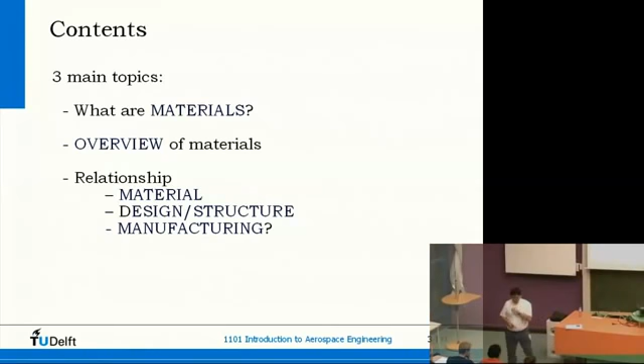First we will briefly discuss what materials are. Can we bring forward some kind of definition for it? What kind of materials are interesting, and then in particular for aerospace engineering? And then I also will tell a few things about different aspects of materials, like the properties and how to design with it and how to manufacture with it.

And then you will see there is a close relationship between these topics. Okay. First question: what is a material? Could you describe a material? Could you give some features of a material?

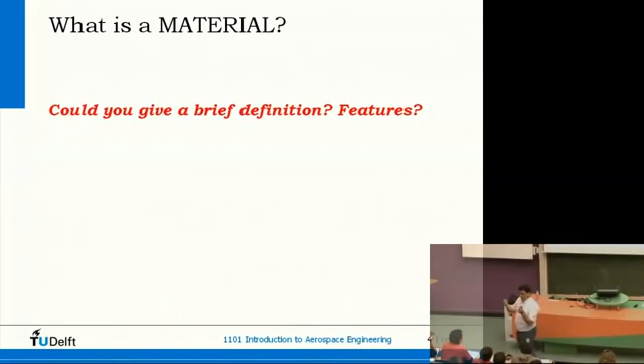Basically, some specific density, strength, which can best do the job. Material has strength, density, and so on. Yeah, density, weight, has some properties indeed. Composition of elements, yeah.

Actually, to give a very crisp and clear definition, that's rather difficult. Also if you look into textbooks and dictionaries, it is rather complicated to find a very nice, neat definition. If we talk about materials, we often have to do with substances, with matter.

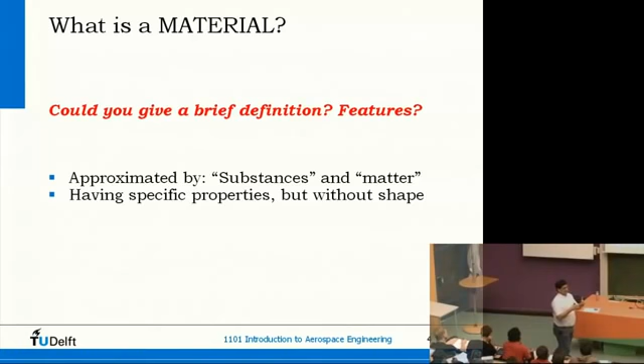All the properties which I've heard already, strength and stiffness and composition, those are related to that material, and it is not related to any geometry. That's the difference, for instance, with a structure and a material. A material has substance, has properties, and a structure has substance, has properties, but these properties are also related to its dimensions.

We can talk, for instance, about the strength of a material. We can also talk about the strength of a structure. If we talk about the strength of a material, we can zoom in as far as we can, and still that material has the same property. For a structure, the strength is also related to its size, to its dimensions. Small structure has small strength, large structure, large strength.

I'm sorry, I don't want to interrupt, but wouldn't the fact that it is a material and that it exists mean that it would have a shape by definition? That since it is a material, it has to have a shape, because without having a shape, can it be a material? But over here it says it's without shape, so it doesn't exist.

Of course matter always has at least some dimensions, but the idea is that if you talk about density of a material, let's take density: however I make the size smaller and smaller, the density does not change. The density remains the same, even if I have a very micro small portion of a material, it still has the same density. If I have to calculate the weight of a structure...

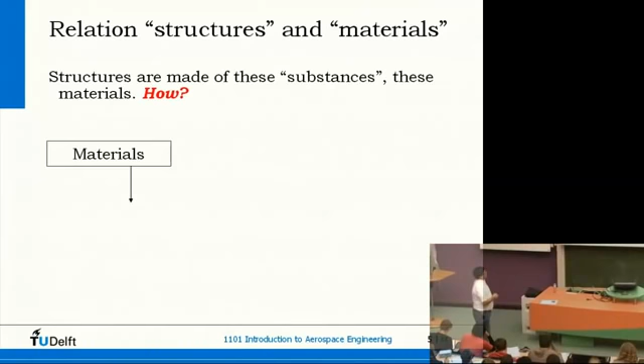And these materials can be big blocks, small pellets, powder, pellets, blocks, whatever. These materials are transformed into so-called semi-finished parts, and semi-finished parts — think about, for instance, sheets, profiles, fibers, and so on.

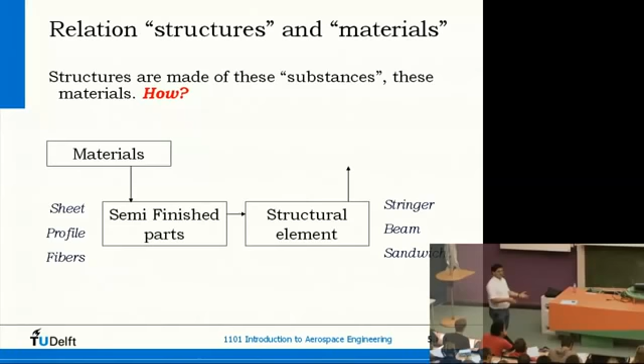From these semi-finished parts, we are going to create components, structural elements. And the structural elements can be a stringer, a beam, a sandwich — I showed some of them last time. And as soon as we assemble those, we obtain our structure. So yes, there is indeed a strong correlation between these two, but more or less via this route.

Okay, let's zoom in a little bit on materials. If we look at materials, there are a number of main groups, to say so. First of all, we do have the metal alloys. Not all metal alloys are significant for aerospace, as you will see later on, but this is a very big group. It contains steel, zinc, lead, aluminum, magnesium, all kinds of metal alloys.

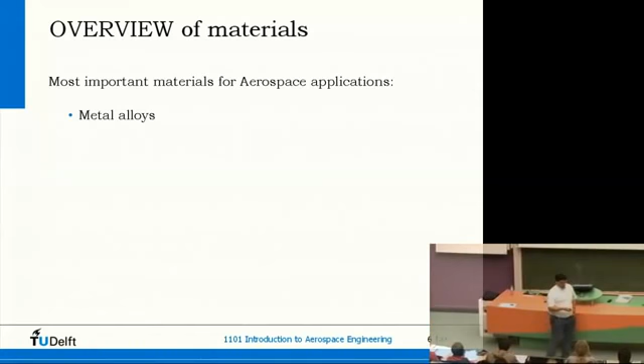The other one, which is often used in aerospace, are so-called composites. A composite means composed of, you could say. It's composed of multiple materials, and I will tell later on how it is done. Fibers and resin, sometimes even metals are included, so then you have a hybrid material.

Some things are made out of duraluminum. What is that again? Duraluminum is some kind of aluminum alloy. If you look at aluminum, you have plenty of different alloys. Every alloy has its specific features, its specific characteristics. So things are not pure aluminum. Pure aluminum is only used sometimes as a very tiny surface layer because it is very corrosion resistant. But the structure itself, the load-bearing structure, is always an alloy.

And duralumin is one of them, but that's an old name. Nowadays we have much better alloys, I think.

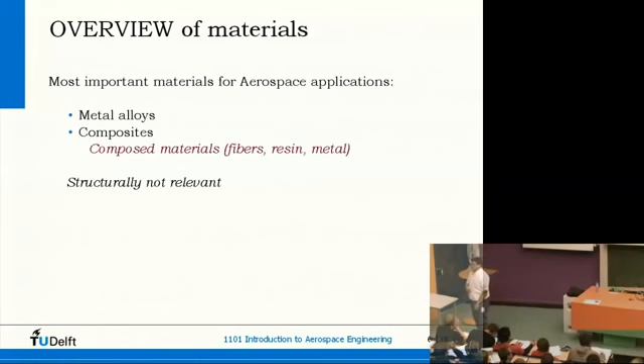Okay, other main groups are, for instance, the polymers and the ceramics. Both are, at least for aerospace, not really structurally relevant. If you look at polymers, you have to think about plastics. Plastics are very nice materials for households, for gardens, for whatever, but you don't use them in highly loaded structures. Then the strength and the stiffness of these materials is way too low.

Ceramics, on the other hand, has another problem. As you can see, it is way too brittle. It is very notch sensitive, and it breaks very easily if you have a load which is not properly applied to a structural part.

I think I don't have any pictures of it, but remember one of the shuttles was damaged by a piece of foam which hit the leading edge of the space shuttle, and later upon re-entry, you saw that the whole shuttle disintegrated because the heat could come into the structure and so on.

That leading edge was made of carbon-carbon, a special kind of ceramics. It's very strong, very heat resistant, but it is also brittle. So if you have an impact in a very specific way, at a very specific place, it could crack, it could damage, it could puncture a hole in it. And that happened in that case. The leading edge was not designed for those kinds of impacts. They were not anticipating it; only very small impacts could be sustained by that leading edge. But there you see, for instance, how a brittle material can be very nasty if it is not used in the proper way.

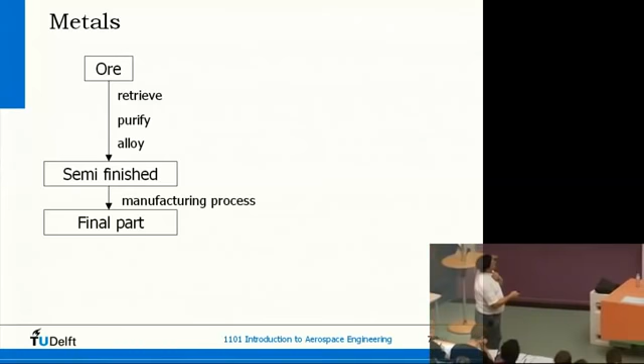These two terms, purification and alloying: purification means that you try to remove all the materials you don't need. So if you have, for instance, iron ore, which usually comes in pellets, small bits of rock where the iron is inside, you try to remove all the non-usable materials. So extract the iron from it, and all the phosphor and sulfur which comes with it, in many cases, should be removed. That's purification.

On the other hand, we would like to add a few things, in many cases, to get the right properties. There could be some chromium, or some molybdenum, or some carbon, or whatever type of alloying elements we would like to need—we put it in. So if we have a molten material, first of all we try to get out all the unwanted stuff, and then put in the stuff we want. That's the difference between purification and alloying.

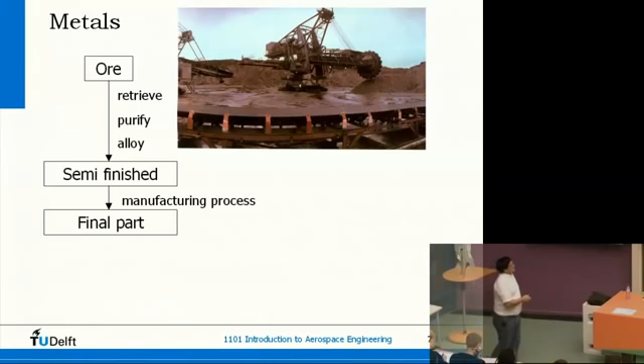After that, we do have a semi-finished material, and in many cases it is first cast into very large blocks. Maybe I have to trim a little bit of light.

Come on. This is the typical sequence for iron ore.

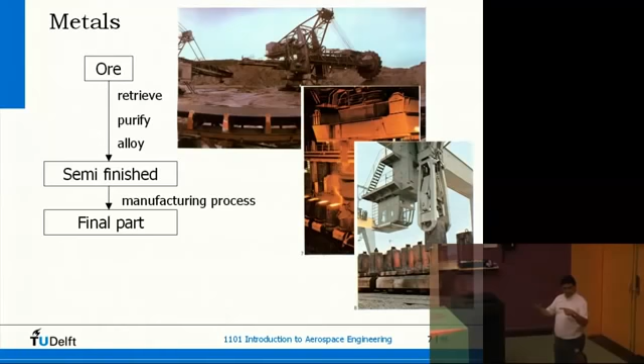Here you see very large blocks, about 2 meters tall and 1 by 1 square. So these represent more or less about 40 tons each. And you can still see that they are glowing from the heat. They are coming from the casting mill, cast into these shapes, put on lorries, and later go to the mill to be rolled out into thick plates or sheets.

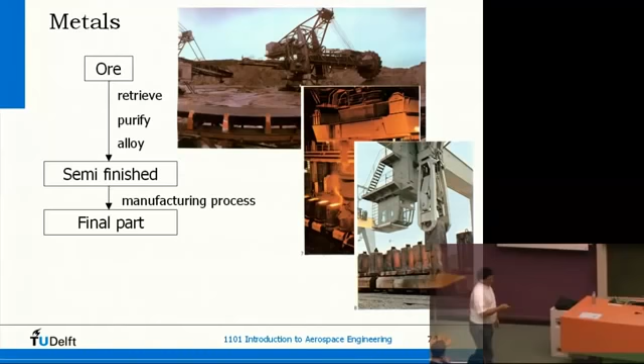And then we have so-called semi-finished parts. Other options are also extrusions, profiles, and so on. From here we go to the final part. So when we have a sheet, we can press form a part from it, and then we have our component which can later be assembled into a structure. Okay, this is typical for iron.

Question: what are the names of these processes used for aluminum and for iron? Iron is the blast furnace, yes. I can't remember the proper name for aluminum, but it's electrolysis, yes. So indeed, blast furnace and electrolysis.

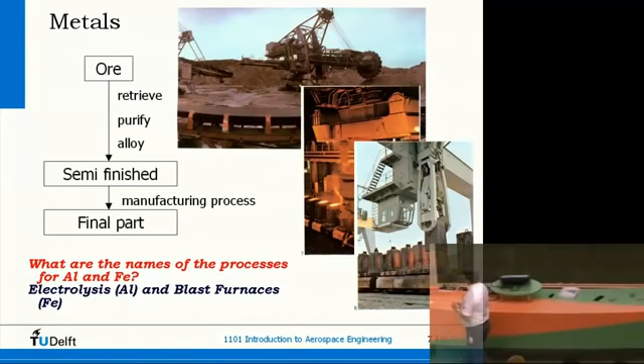This is, by the way, a very energy-consuming process. In Holland, for instance in Borssele, we have a nuclear power plant, and that was built there because next to it, in the harbor of Flushing, there was a very big aluminum plant, and a lot of that energy went into that plant. That's why it's also very important to recycle aluminum, because then you can get new aluminum at much lower energy levels.

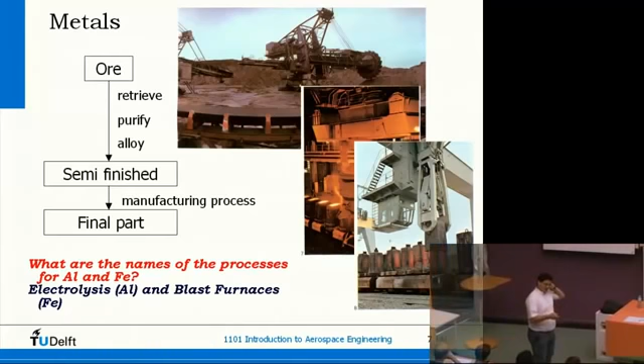Metals have a number of typical properties. First of all, most metals are isotropic. What's isotropic? Anyone know?

Actually, isotropic means that the material properties are independent of the direction. So if I take a piece of material and determine the strength in this direction, it's identical to this direction or that direction. Same with the stiffness. Of course, the material is also homogeneous, so the density is the same everywhere. That means isotropic. Properties are independent from the direction which I take in the material.

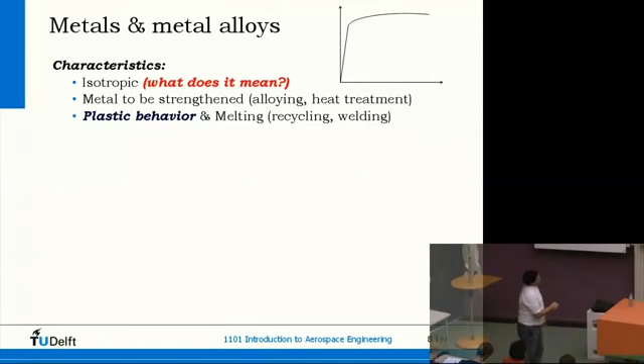Okay, most materials are indeed isotropic. The strength we obtain usually by alloying and heat treatments, putting in materials and doing some heat treatments, that will be told later. Most metals also show plastic behavior, and plastic behavior has a very beneficial advantage because we can shape a product from a flat sheet.

Metals can also be melted, can be made fluid. This also has an impact on, for instance, recycling, welding, casting - good processability and often low cost. Not all metals are cheap, but a lot of them are cheap.

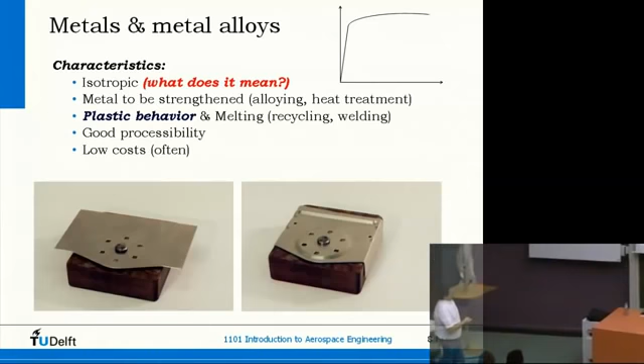Next slide, you see some properties of metals. Just to show you, first of all, the density has to be related to the weight. Then the Young's modulus - you already had some information about these properties, or not? Some yes, some no. Well, it has to do with the angle of this one.

The steeper the curve, the more resistant the material to deformation, and the higher the Young's modulus - the stiffer the material. Stiffness means resistance to deformation, and the stiffer a material, the larger the force I need to give it some deformation. That's represented with this number. So steel has a high stiffness when you compare it to aluminum, and titanium, for instance, has some intermediate value.

Yield strength is this point, the transition from elastic into plastic. During operation, I always have to stay below that. When I would like to manufacture by plastic deformation, as in the previous slide, I have to go beyond that point. Failure strength is the maximum strength, and the maximum strain is the maximum deformation I can take, if I plot this as a stress-strain curve.

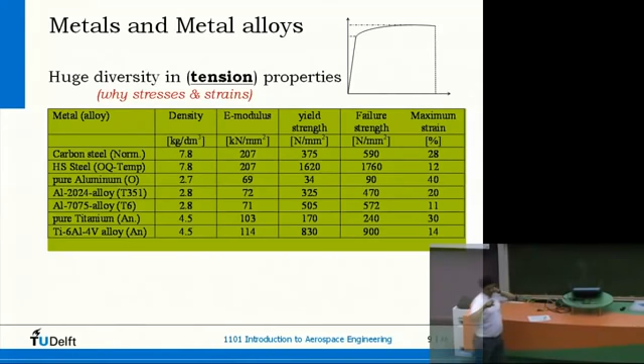Realize this is also only for tension. If you go to bending or to compression, you can have different ratios, different formulas for the stress and the density. But for this simple application, pure tension - and I challenge you to look for it at home - you can have stress divided by density.

If you do that, you find these numbers, and that's what we call specific values. What's very striking here is that most of these specific stiffnesses are more or less identical. If I go back, here you see large differences, but this large value is also divided by a large density, so this ends up almost around 25. More interesting, of course, are these strength values, yield strength and failure strength.

Now what you see is high strength steel is still maybe the highest, but not by that huge difference as on the previous slide. Titanium here is also coming very close, and also this aluminum is coming very close.

So now if I have to design a structure, I will not only look at these specific properties, but also look, for instance, at thicknesses. If I need a specific force and this ends up with a thickness of 0.3 millimeter, that's very thin, so it will be very vulnerable by handling or by impact. Aluminum probably will be about 1 millimeter if you compare it. Titanium maybe 0.6, 0.7 - much more rigid, much more sturdy to impact and these kind of things.

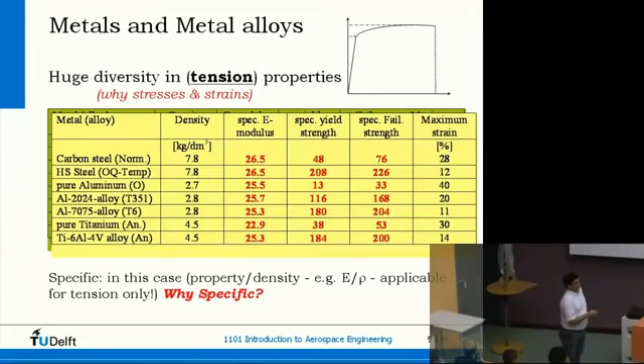Next group is polymers. As I said before, polymers are not very interesting from a structural point of view, and still I would like to have a quick look at them, because polymers are one of the major ingredients in composites. Some specific properties of polymers are also influencing my composites.

Two main groups, thermoplastics and thermoset polymers. Thermoset polymers are made by reaction. You have two components, you bring them together, they react, make a molecular network, and that whole process is irreversible. You cannot turn it around. So once you have cured your polymer, the shape cannot be changed anymore.

That's different with a thermoplastic. A thermoplastic is made of large molecules with some weak bonds between the molecules, some kind of spaghetti. At room temperature, it's rigid. You can use it, but heat up the temperature, and the bonds between this spaghetti disappear. It becomes more fluid, so you can reshape it, and you can redo that frequently.

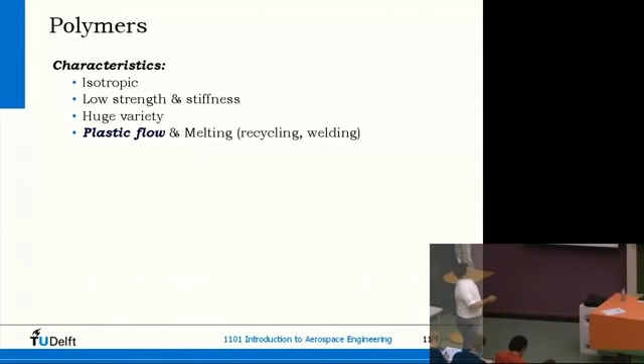All these plastic coffee cups we have, but also plastic chairs and furniture for the garden, are all made by injection molding, this process. Tooling is usually very large, but since you have huge quantities, it's not really a problem. Good processability, and in many cases, cheap. Very cheap materials.

If you have thermoplastic materials, you bring two together and you have a local heat source like a laser. You can locally melt them, push them together, force them together, and you get a weld.

It has not really become fluid, not very water-like material in between. It is some paste material, whereas in metals, you really make it fluid, you really make it liquid. But indeed, it is some kind of welding, local heat source and pushing together, and you have a weld.

Okay, polymers, composites. Composites are made of polymers and fibers. Many different types of fibers are available: glass fibers, aramid fibers, carbon fibers, dyneema fibers, and so on, and so on. Boron.

Short, long, and continuous. We mean with short only a few millimeters, and with long a few centimeters, and with continuous, well, at least a meter or longer. Most of the high structural parts, the high performance parts, are made by continuous fibers, because those can be oriented in a certain direction, the other ones cannot.

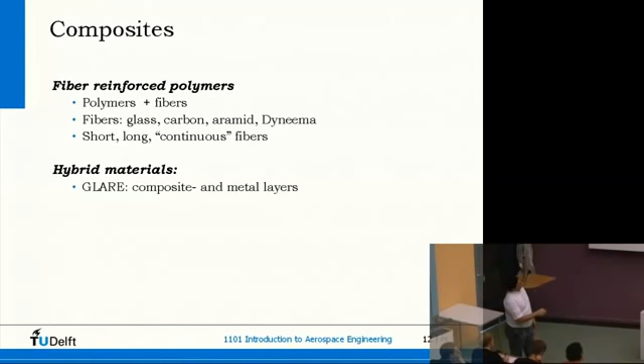In many cases, in components with short and also with long fibers, the fibers are more or less oriented at random. The direction is not controlled. That's possible with the continuous fibers, not with the short and long ones. Hybrid materials, that's actually polymers, fibers, and metal layers. That's sometimes called a composite, sometimes called a hybrid material.

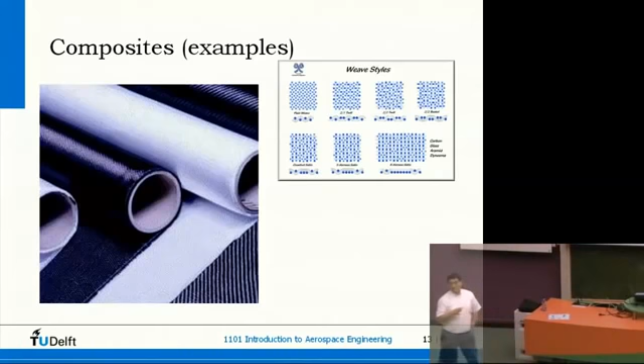In many cases, yellow is, for most reasons, if there's no resin to it, aramid; white, glass; black, carbon. So you can recognize most fibers. It's not always true, but as a rule of thumb, you could say so.

If you look at composites, I would like to explain a little bit the principles of composites. Realize the fibers are the materials in there which are strong, which are stiff.

And for the strength and the stiffness of a component, these materials are sufficient. But as we have a rope, we can pull onto a rope, but we cannot compress a rope. As soon as you have a fiber, you can tension it, but not compress it, because then it buckles in all directions.

That's where the resin comes in. The resin is there for supporting, making it able that you also can have compression forces on composites, and of course also to protect the fibers, so that no moisture or whatever can degrade my fiber. But the strength and the stiffness is provided by the fibers.

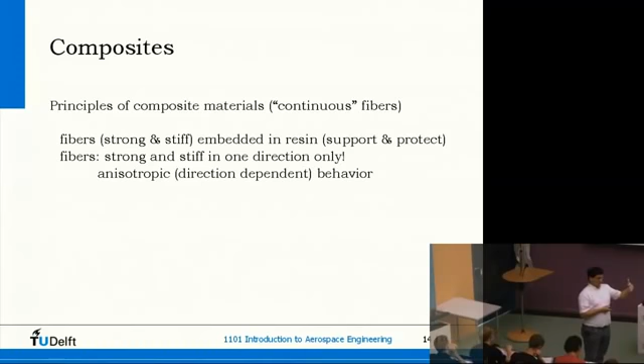Fibers are strong and stiff in one direction only. If you have here, these resemble the fibers. This thin layer of fiber composite has strength in this direction only. In the other direction, the strength is related to the polymer, and that strength is rather low and can be more or less neglected. If I also would like to have strength in this direction, I have to build up a so-called laminate and put layers in different directions.

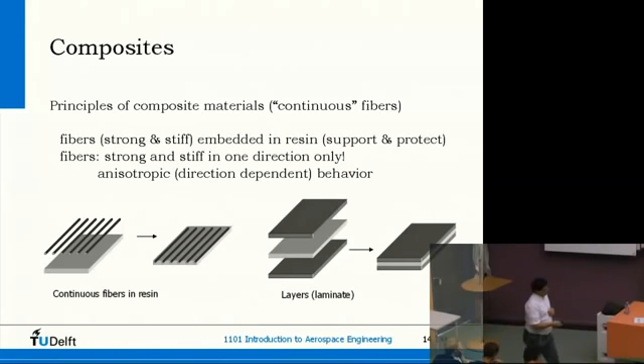Some features of composites: highly anisotropic. That means the properties do depend on the direction I will look for.

It has also a benefit. If I have a strip like this, and the main load is in this direction, the length direction, I can put most of my fibers there, in that direction. Very little amount of fibers in that direction for coherence, but most of my fibers can be in that direction. Then I use my material very highly efficiently.

This is a metal one. It is as strong in this direction as in that direction. In that direction, I don't use that strength, so it's over-designed more or less. That's why composites can sometimes be very lightweight.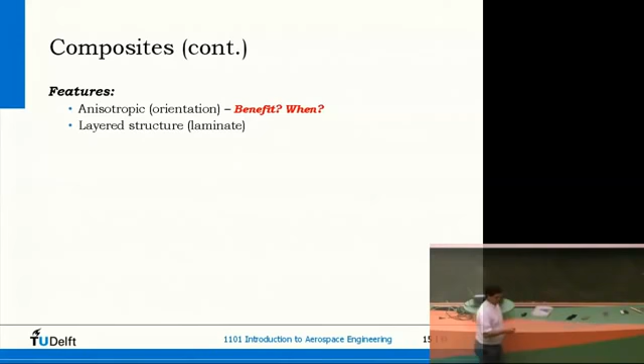It's a layered structure, high strength stiffness, low density, no plasticity. Processability is also rather good, and you can make nice parts of it.

Sometimes made in laminates. It's too fast. Yep.

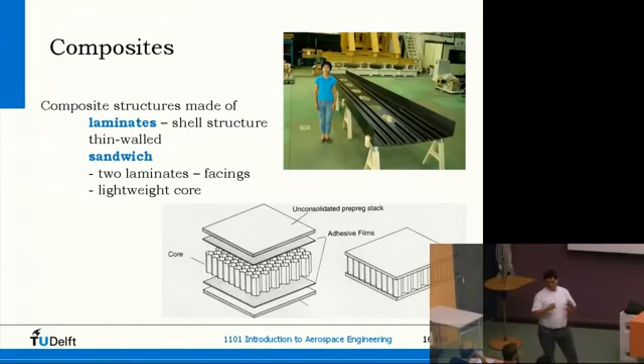Made in laminates, just like metal sheets, more or less. And sometimes it is made in sandwich materials, either a honeycomb core material or sometimes a foam core material. Here you see, for instance, these flaps on an aircraft are in many cases partly or sometimes even completely made of sandwich materials. And here you see how it is constructed.

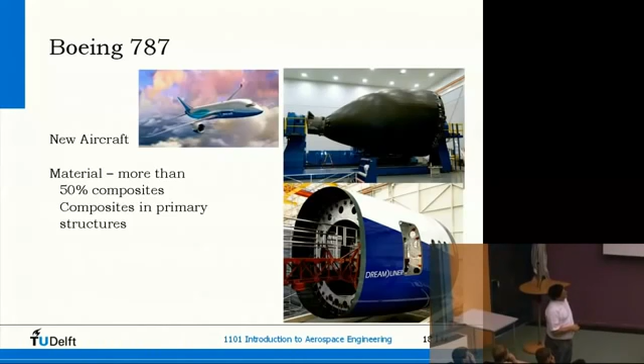Boeing 787 is a new aircraft, I think entering service within a couple of months. A lot of it is made from composites. The fuselage is almost entirely made of composites.

Well, here you see the inside. All kinds of stiffeners in this case, some beams, and so on.

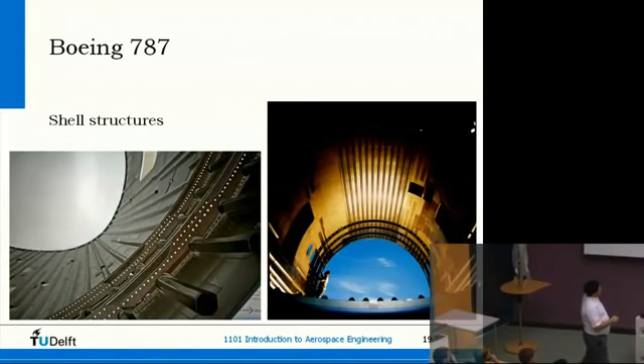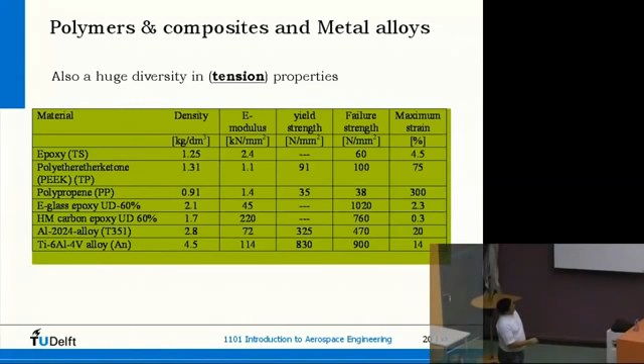Well, if you compare it, you can already see that glass is very strong, carbon is a little bit less strong, but that changes when we go to the specific properties again, as you can see here. And then you see that these composites can have very high specific values, both in stiffness and in strength.

Again, realize we are talking here about unidirectional materials. As soon as you have to make a component which is loaded in more than one direction, these values will drop. But nevertheless, you have a potentially very high valuable material.

Again, the yield strength—these materials don't have a yield strength. If you have a composite, it's more or less elastic until it fails. So usually these composites don't have a specific defined yield strength. Yield strength is typically what you often see with metals, when you go from the elastic into the plastic area. But that is not happening in composites.

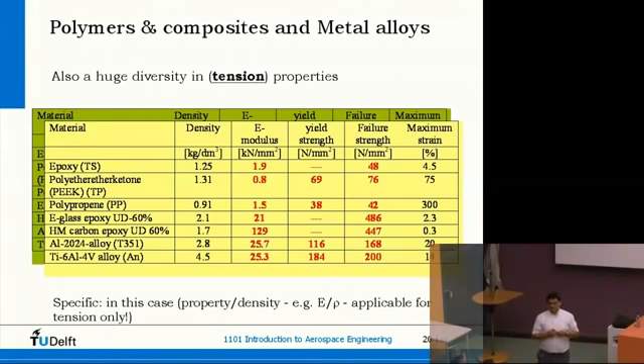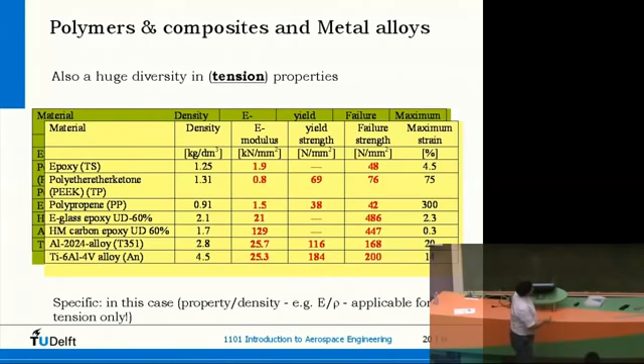The maximum strain, that means how far I can stretch a material before it fails. And there you see one of the weak points of composites: it is very brittle, with a very small amount of deformation possible before it fails. That's much better for metals.

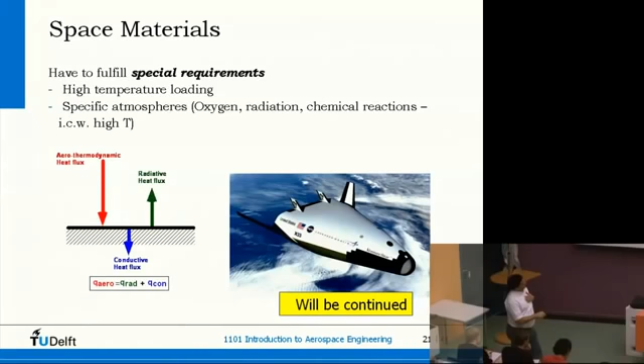Okay, some space materials, some special materials. For instance, space materials—I will come back to that later on. But for space materials, this is a very important relation: the heat coming in and the heat flux going out, and how to dissipate, how to cooperate with heat.

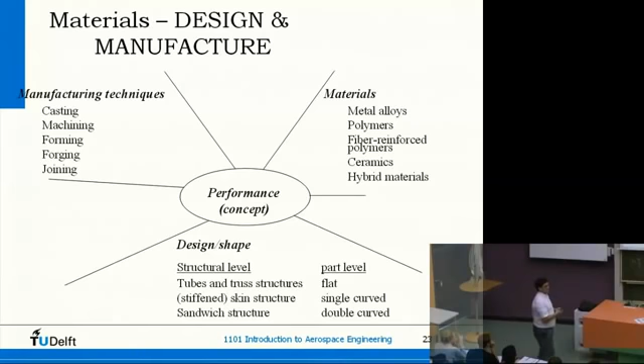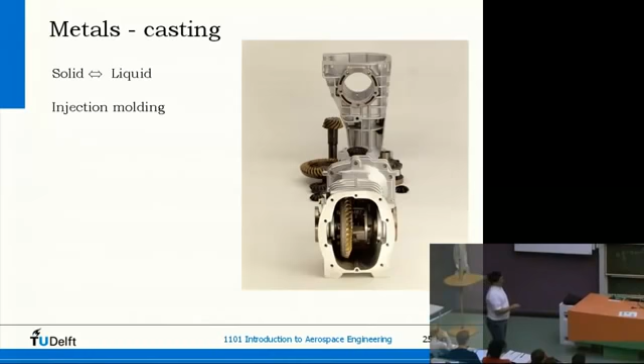I'll just show quickly a few of them. For metals, for instance, we can have casting and forming—two very famous and favorable processes. Here you see, for instance, this aluminum casing for some wheels. This one is made by a casting process. A metal can become liquid—if you heat it up it becomes liquid, and we can pour it into a die, cool it down, solidify it, and then we have a shape. And you can see we can have very complex shapes.

Metals can also be machined, cutting away material. Here you see, for instance, some kind of bracket for an aircraft. This is completely machined from a block—you take a block, machine away about 90% of the material, and you end up with your final product, usually done on big milling machines.

Why isn't it possible to cast some brackets? You can also cast it—this shape can also be cast, can also be forged, but then you have to balance, you have to make a trade-off of which is most beneficial from a cost point of view, from a performance point of view. It's possible, you could also cast it.

How would the way of manufacturing affect the performance? Because in the end it's a product. If you cast, for instance, if you would cast a structure like this, the microstructure is different, and that can have an impact on, for instance, fatigue, on corrosion. So from a corrosion point of view, a fatigue point of view, this could be better—not always, but this could be better.

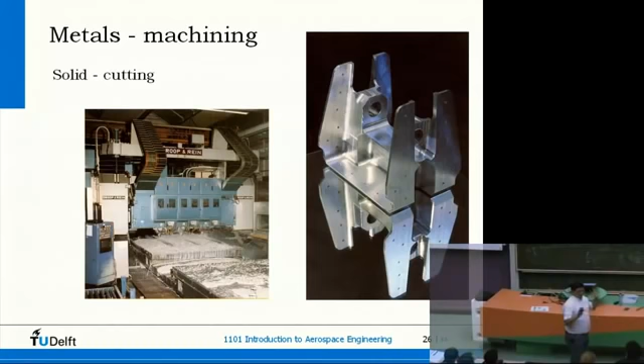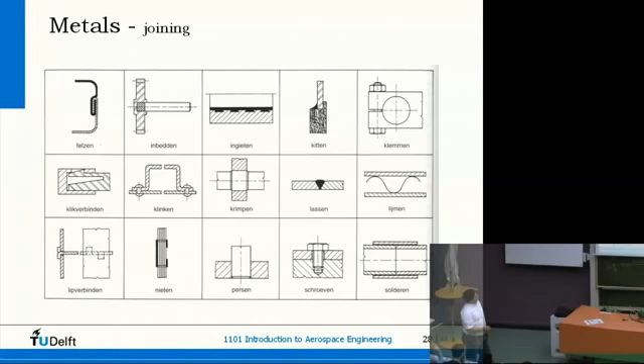Forming—all kinds of different forming operations, starting with a flat sheet and then forming it into all kinds of shapes. And finally, a multitude of ways to fasten things together, to assemble structures from these components: riveting, welding, forming, squeezing, and so on.

Composites are different. Composites in many cases come in layers.

Layers of fibers in weaves, fabrics. Sometimes the resin is already brought onto that weave, and then we have a so-called pre-preg, pre-impregnated fabric. What we do in composite manufacturing is build up a structure by putting layers on top of each other.

For instance, in the layup process, once the whole stack is completed, you put it into a foil, into an autoclave, and cure it. After 1 or 2 hours of curing, you have a solidified, cured product which can be used in an aircraft.

Here you see parts made by press forming, just like metals. Before this press forming operation, we have flat laminates of thermoplastic materials. These are cut into the right pre-shapes and then press formed. Before the forming operation, we heat the material to make the thermoplastic soft, so it can form. This is only possible for thermoplastic materials.

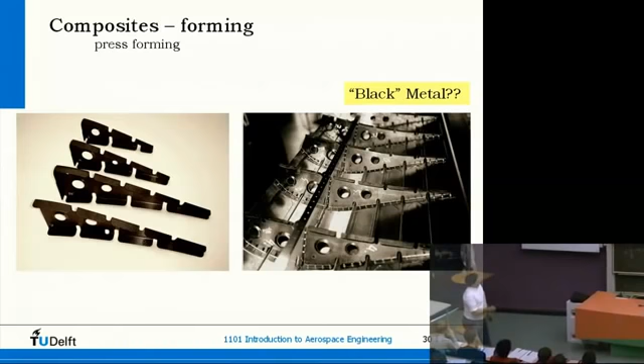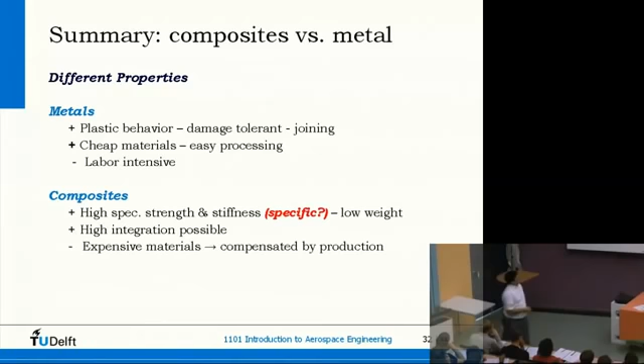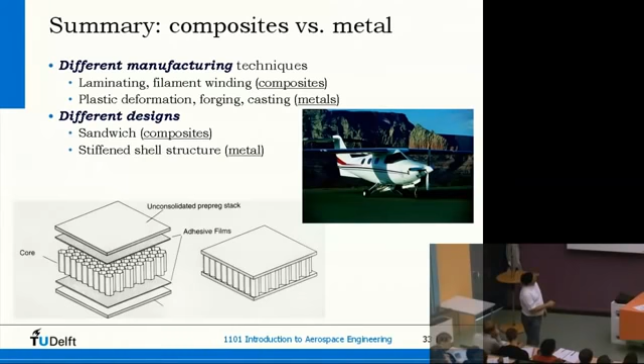So summarizing, if you look at the different properties, that has an impact on how to produce it. Metals have plastic behavior, meaning you also have damage tolerance and joining, and you can have forming operations. Composites have different properties, and here you see some impacts on manufacturing: sandwich, different cells, laminating, and so on.

Okay, questions so far about this one? Realize the main message I brought in the last 5 or 10 minutes was that there is a link between your material, the shape you can get, and the production process.

What type of exam questions can you get, or is it more basic knowledge? For me, most important now is understanding. So if I have a multiple choice question that says casting can be performed in metals, composites, hybrid materials, you should be able to say it's okay for metals, but not for composites, as an example. Or I might ask you to mention at least two production processes for composites. Then you could say layup and filament winding, and so on.

This one is a little bit about exploring the limits. I forgot here to mention what chapter it is, but I will put it on later. Later on, I will put it again in the slides, so when I put it on Blackboard, there will be some Anderson chapters or paragraphs in there.

This is about X-planes going from subsonic to supersonic, and if I have some time, also a few words about high temperature materials.

X-planes means experimental. After the Second World War, there were a huge number of experimental planes, and I think they are still going on. Each of these planes has some specific goal to investigate some specific property. One of the first, and I think the most famous, is the Bell X-1, which you can see here, the first to fly faster than the speed of sound. They conquered there the supersonic, or so-called sound barrier. You see, it's only just beyond the speed of sound.

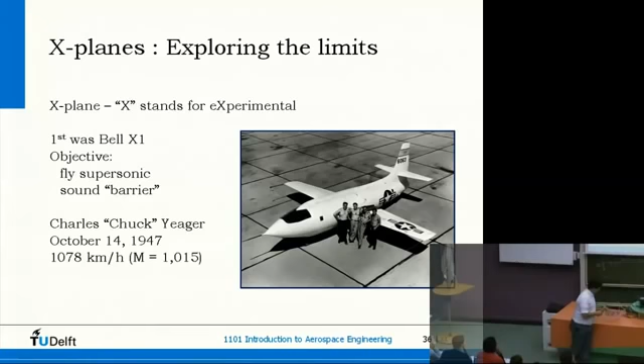As I said, a lot of these X-planes were produced after the Second World War. If you look at this, you can see a large overview of all kinds of X-planes. I think one of the latest, maybe already obsolete, I don't know, is somewhere around the X-53 or something like that. I will show a few of them and mention how they used them to explore the limits of flying. First of all, the X-1 was to conquer the sound barrier. Here you see another one, the X-1A, X-1B, derivatives of the X-1, the Bell X-1B, which flew a few years later and exceeded even Mach 2, twice the speed of sound.

Expensive projects in many cases, because as you can see, these aircraft only flew a few times, 15 flights and 27 flights. Well, for a very expensive aircraft, it is also a very expensive program.

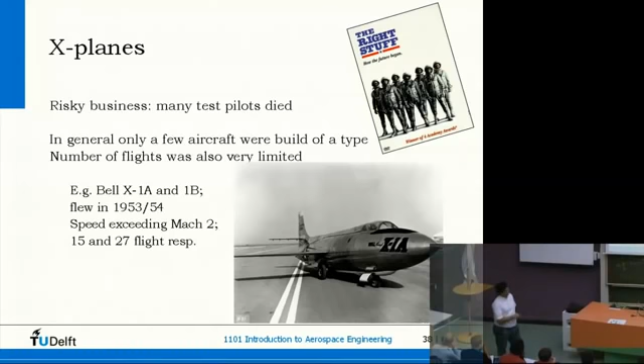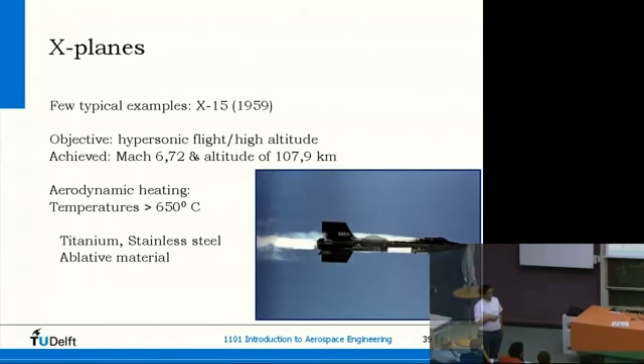Another one, in '59, more than 50 years ago, that's the X-15. You see a picture of that aircraft here. So far, the aircraft with the highest Mach number, 6.7, and also very high altitude. Temperatures on this aircraft exceeded 600 degrees Celsius, so that's not flying around anymore with aluminum. You need to have steel or titanium alloys. Very expensive aircraft, again.

Composite, however, you can tailor. You can tune the materials, the properties you like. So in this case, the structure has been tailored such that even in a forward swept wing, with a bending up, you still have a forward twist of your wing box. That's possible with composites, structural composites, and not with metals.

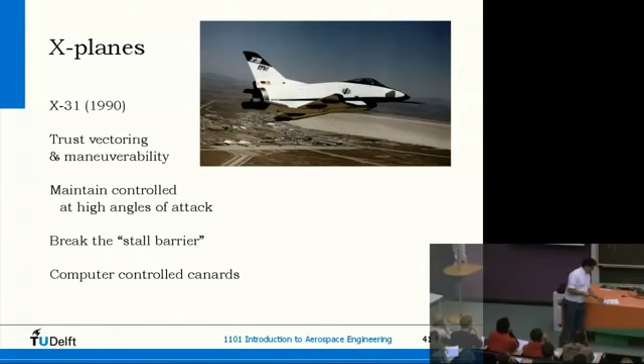32, 35, that's nowadays what we call the JSF. This is our JSF fighter nowadays, but it started as so-called X-planes, a competition for an aircraft that can take off in a very short or even vertical position—short takeoff and landing, or even vertical takeoff and landing, in one aircraft. That was the challenge, to come up with concepts for that. The Harrier also did this, but this is a new generation of aircraft for it.

X-45, that's an unmanned combat vehicle, one of them. I think there are several X-planes in this domain still developing further. Well, that's just a very rough overview of X-planes. I would go back to the first X-planes, because then we were struggling with the speed of sound, the Mach number.

Who built the X-planes? That's usually different companies. So sometimes it's Grumman, sometimes it's Rockwell, sometimes it's Boeing. Usually there is some kind of competition between companies.

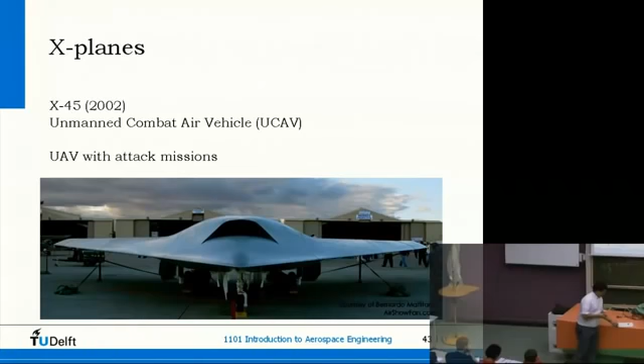Speed of sound. For the speed of sound, we often use the so-called Mach number. The Mach number is defined as the velocity, the true airspeed of the aircraft, divided by the speed of sound. If this number becomes 1, we are flying as fast as the speed of sound, and then we have sonic flow—we are flying sonic. Beyond that, it's supersonic; below that, it's subsonic.

Well, this is one very strict division. We often use also a division like this: you have subsonic below Mach number 0.8, 0.9; transonic in the regime of 0.8, 0.9 to 1.2; supersonic from 1.2 to 5; and hypersonic beyond that.

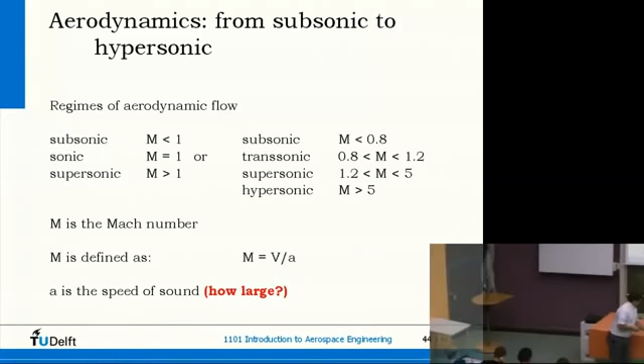Well, let's have a quick look at what that means. If we fly subsonic, the speed is smaller than the speed of sound. So if I travel from here in this direction, the sound progresses faster than what I'm flying. So what you have here is densification of the sound, here less density—that's the typical Doppler effect. When something comes to you, you hear a high sound; when it's past you, you have a low sound. That's represented in the density of these lines—the Doppler effect.

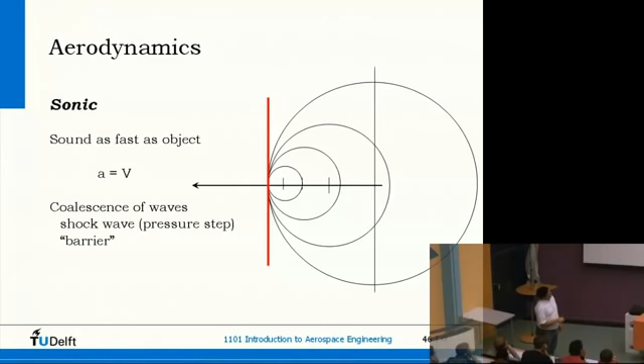As soon as we are flying Mach 1, you see a coalescence of these circles, and you get more or less a shock wave here. The pressure before it is lower than the pressure after it. It becomes even more significant when you're flying supersonic - you get these so-called shock waves. The shock wave is nothing less than the pressure difference.

So when I'm standing on the ground and an aircraft is passing by, flying faster than the speed of sound, I hear a bang, and the bang is a pressure difference. Just before hitting me, the pressure is lower. As soon as this passes, the pressure is slightly higher. That gives me a bang in the ears. So we perceive it as some kind of bang.

You have a coalescence indeed of waves. You also see here an angle, mu - the Mach angle, mu. What's the proper English pronunciation? Mu, okay, mu, from now on. Here you see the velocity, and here you see the speed of sound times a time interval. This angle represents, of course, my Mach number. The sine of that mu is the reciprocal of this Mach number.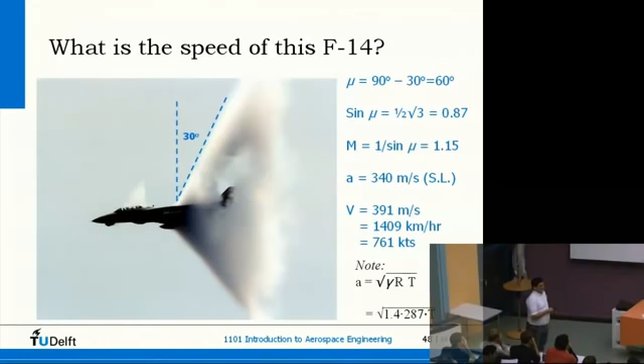On the internet, again, there are a lot of nice short movies about aircraft flying supersonic, and this one, I think, is also always a very nice one. Have a look at it.

I cannot hear you properly. What happens if you break the speed of sound underwater? My goodness, I don't know.

I really don't know. First of all, I think there's a completely different speed of sound, that's one, and also the density of the material is completely different. But nice question to ask when you are going into aerodynamics - ask the aerodynamics people about it.

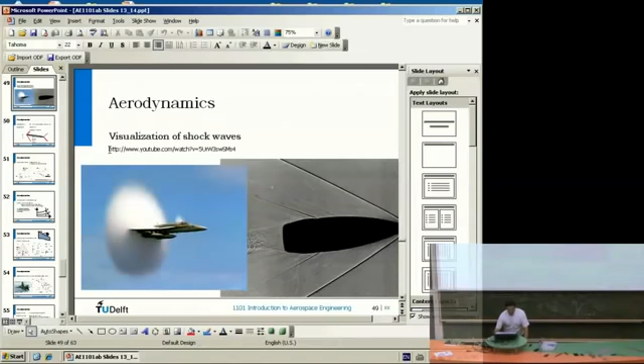Again? Is the sound barrier of is this cloud all the way existing, or does it... no, go back please. Maybe I can... try to see where I can get it. Come on.

Once more. I hope that answers your question. Sir, that answers your question?

Because an aircraft is not just going through some shock waves - no, it's flying around and dragging with it these shock waves. So his question was, does you see this cloud only once when it passes through? No, it takes it with it. And of course it depends on the composition of the air whether you see a very significant cloud or not. I can imagine that when he's flying at higher altitudes, but then the moisture in the air is much less or drier, you do not always see such a cloud.

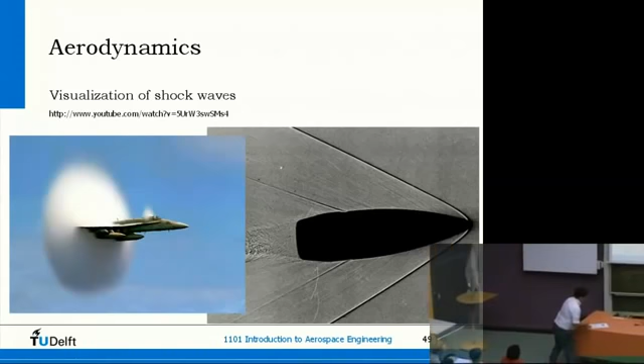Just a few words more about this. This is what happens when flying faster than the speed of sound. We have seen before that at very low speeds you can regard the air as incompressible, but that's not possible if you're flying faster, let's say 300 or 350 kilometers per hour. Up to then you can regard it incompressible, and for most general aviation that's the case. For civil and military aviation, you are always in the regime where you have compressible airflow.

This is what happens: you have a speed and a Mach number, a pressure and a temperature before and after a shock wave, and you see these are changing. The speed is smaller after the shock, so also the Mach number. The pressure is slightly higher, and the temperature is somewhat higher too.

So after a shock wave, pressure and temperature increase and speed decreases. Sometimes you can also experience shock waves even when flying subsonic, depending on the airflow over your wings. Very close to Mach 1, you can already have some supersonic flow closing with a shock wave. Or sometimes if you try to fly with profiles typically designed for subsonic speeds, you can have a very big shock wave in front of your wing, and these are very detrimental for your drag.

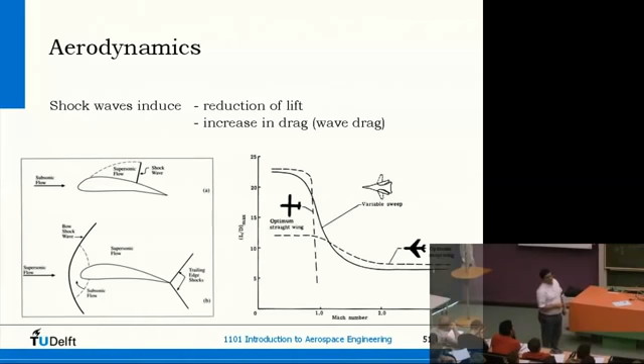Here you see again the same effect, where you have drag coefficients which are low at subsonic speeds but increase significantly as you come close to the speed of sound. That's why people always experience this as some kind of sound barrier - it's very difficult and problematic to surpass the speed of sound. You also get a lot of buffeting, trembling of the wings. So in the early ages after the Second World War, they were very anxious to go beyond the speed of sound - that's why the Bell X-1 was launched.

With no sweep, you have a huge increase in drag, but with a proper sweep you have much lower drag. It helps because, first of all, the true airspeed - the real airspeed flying over the wing - becomes smaller when you have a sweep. Sometimes even your whole wing can be staying out of these shock waves, and after the second shock wave your whole aircraft is still flying subsonic. It's dragging along a lot of air.

Here's actually a similar story - let's have a look. These are points for this configuration, these are points for that configuration, and here are the points for this other configuration. Typical aircraft like the Tomcat and Tornado have a variable sweep.

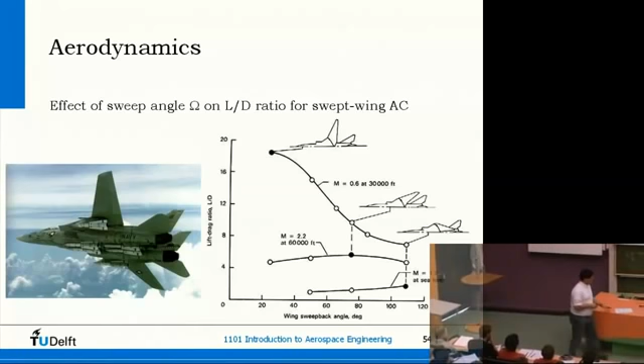So in the transonic regime, close to the speed of sound, close to Mach 1, you have in many cases a very high drag. At supersonic speed, you may have a lower L/D ratio, but a much higher speed - so the dynamic pressure is compensating for that.

That means for takeoff and landing you need very high takeoff and landing speeds, and also very long landing strips - the runway should be very, very long, usually in the order of 2 to 3 kilometers. Nowadays you see, for instance, a lot of new aircraft like the F-16 and F-18, which can take off within a much shorter distance, but they have an increased wing surface. This aircraft has an astonishingly small one.

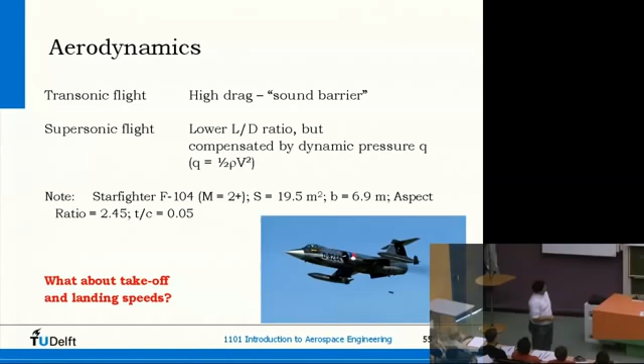Okay, a few words about high temperature materials, if there are no questions about this story on shock waves and Mach numbers.

We have seen already this aircraft, the X-15, which was flying through the air with very high speeds, Mach 6 and beyond. It had indeed very large temperatures, 600 degrees or even more. That means we cannot use aluminum anymore. We need to have stainless steel, titanium, and so on.

Here you see some of these materials: aluminum, titanium, stainless, Inconel. In particular, titanium is for those applications a very good material. It has high strength, high temperature possibilities, and is still not too heavy. The density of titanium is 4.4, 4.5, whereas for stainless steel and Inconel it is 8 or beyond. So that's very heavy.

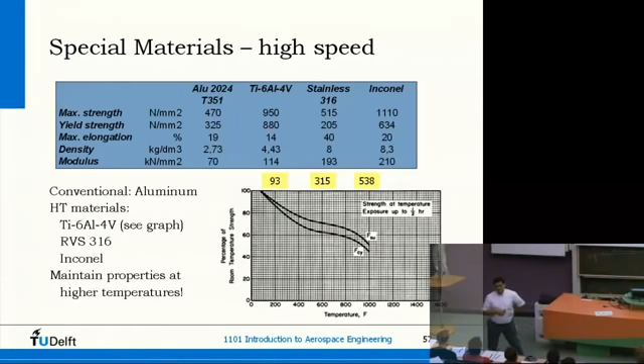Inconel is a special steel, nickel, chromium alloy, so it's a mix of these elements. That's often used as a special high temperature alloy for space applications or for applications like this one.

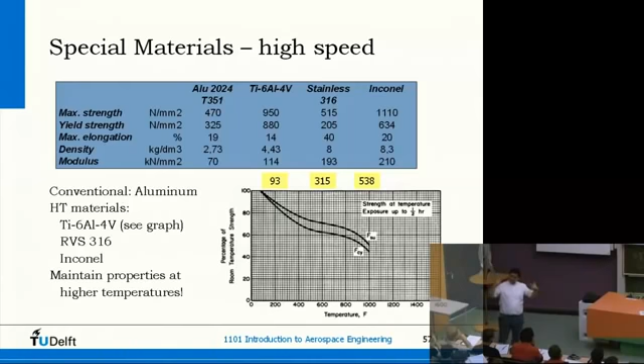We also have to look at the temperature relationship. Here you see, for instance, the temperature relationship of titanium alloy. This is about room temperature, and here you see this is about 540, 600 degrees. So the strength decreases by a factor of 2. You have to keep that in mind if you are designing an aircraft like that.

Another one, the Blackbird. It is made of titanium for more than 90%. It flies at Mach 3, so very high speeds. Temperatures of the leading edge up to 400 plus degrees. So that's also rather hot.

I said titanium is a very nice material from a property point of view, but from a manufacturing point of view, it's really a very difficult material. It is difficult to form, difficult to machine, and welding is not that easy. So indeed, titanium is an ideal material, but from a manufacturing point of view it costs a lot of headaches. But as you can see, we can manage and make these aircraft and fly them around. Leading edge of 400 degrees, still not capable with aluminum.

If you look at the Concorde, you see here in the notes, Concorde was made for a Mach number of just over 2, because in that case the maximum temperature could be kept about 120, 125, and in that case we still could use aluminum structures. So there's here a decisive link between the temperature and the use of materials.

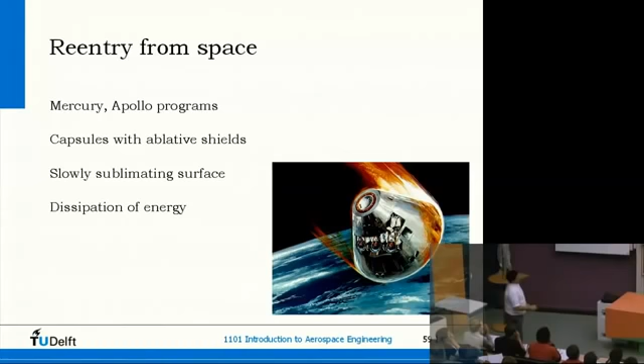Well, if you go into space, you have different requirements for materials. One of them is, for instance, these heat shields, completely different materials. In the early ages, they used so-called ablative shields, meaning that when it enters, the heat dissipates very little material, but by dissipation a lot of energy was consumed by the dissipating, sublimating surface.

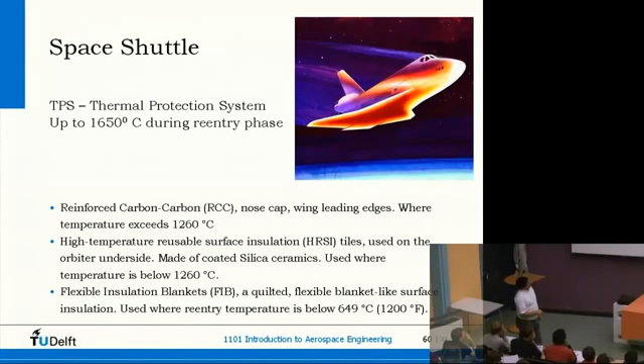A lot of tiles are used on other areas where the temperature is not that high, or insulation blankets. Here you see, for instance, one of the tiles. The tile has a foam-like structure in between, so it is very much isolating the inner structure. It takes up some heat, but there is a lot of silica. Here you can read what kind of materials are used.

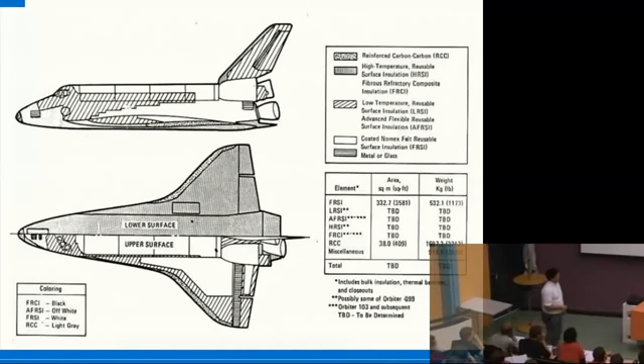The fun thing about these tiles is that most of them were not identical tiles. There were maybe a few thousand of these tiles on the aircraft, every one more or less different. So it was very complicated and very costly. Here you see the distribution of all the different materials: the hot structure here in front, the carbon-carbon, the tiles, this area, the blankets, and so on.

Okay, so that's something about these special materials. I'm at the end of this second hour. First I started with some explanations, some speed records, some altitudes, but that means also that flying at high speed you need special materials, and sometimes very weird materials.

Questions from your side? The airplane that holds the record was the X-15. Yeah.